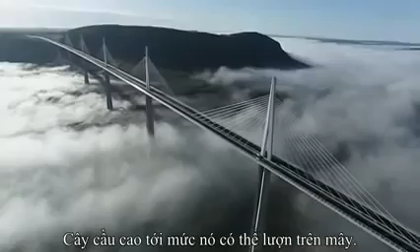This is the Millau Viaduct, the tallest bridge in the world. Its highest tower stretches a staggering 343 meters. So high, the bridge glides above the clouds. But this is a megastructure they said couldn't be built. When I've shown first the drawing of this bridge, they really thought I was crazy.

The team attempting to build this amazing freeway in the sky had to survive landslides, fight winds gusting at 130 kilometers an hour, and weather massive storms as the bridge simply hung in the balance. It's a bridge that pushes the boundaries of engineering to the limits, and then beyond.

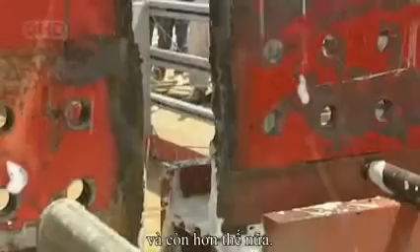Imagine building a series of Eiffel Towers, then slinging a 4-lane highway between them, all the way across one of the deepest valleys in France. Impossible though it sounds, that pretty much describes the building of the Millau Viaduct.

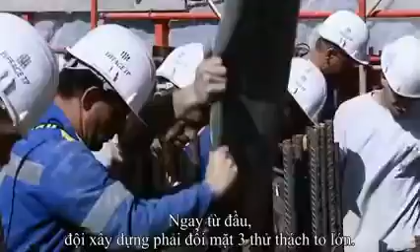From the start, the construction team faced 3 daunting challenges. 1. Build the tallest bridge piers in the world. 2. Put a 36,000-ton freeway on top of them. And 3. Erect 7 steel pylons, each weighing 700 tons. And what's more, they had to do this hundreds of meters above solid ground. So high that if you were on top of the Eiffel Tower, you'd still be looking up at this awesome bridge.

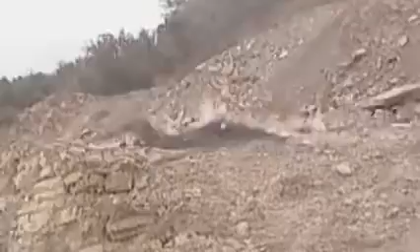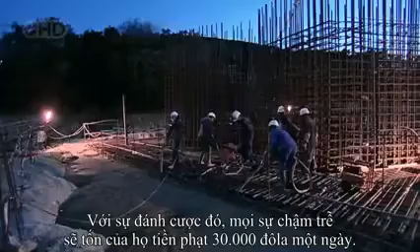October 2001, the team break ground. They're required to build a bridge that'll last for 120 years. And to win the contract, the teams promised to build it in record time, less than 4 years. By comparison, the world's longest suspension bridge, the Akashi Kaikyo in Japan, took a full 10 years to build. To up the ante, any delay will cost them $30,000 a day in penalties.

There are 7 piers that are numbered from the northern end of the valley. Number 1 will pose problems because of the steep slope. Number 2 will be the biggest challenge since it's the tallest. Crossing the river, number 3 is not much shorter. Then 4, 5, 6, and 7 climb the gentler slope to the south.

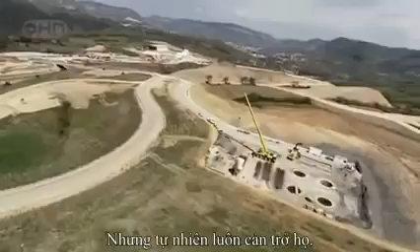To begin, the team had to bury the foundations deep in the bedrock in order to support the enormous weight the bridge will place on them. But the forces of nature were stacked against them. Geologists have warned of the risks posed by the region's fractured limestone. The rock is full of cavities that are essential to the local cheese economy. These cave systems, close to Millau, are home to a unique bacteria responsible for the blue mold in the world-famous Roquefort cheese. But what's perfect for cheese could be disastrous for a megastructure.

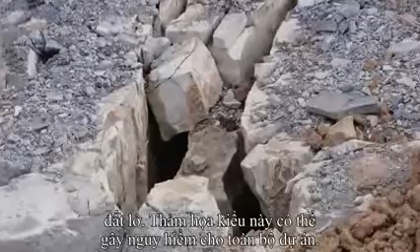The geologist's diagnosis spelt one thing: landslides. This kind of catastrophe could jeopardize the entire project. Despite the warnings, building went ahead as planned. Then, well into construction, as predicted, a dramatic storm causes a landslide. 4,000 cubic meters of rock collapse around Pier 1. Fortunately, the fallen rock doesn't damage the pier, but the warning is clear. They're forced to divert precious manpower and equipment to stabilize the slope and prevent a repeat collapse.

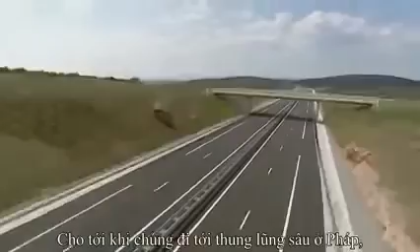So if the area is prone to landslides, why did they build the world's tallest bridge here in the first place? The answer is simple. In the 1980s, France built a freeway linking Paris directly with Spain. This major artery headed south across the French countryside, while from the Mediterranean, the freeway headed north, until they both hit one of the deepest valleys in France and stopped dead. Welcome to Millau, France's least favorite bottleneck.

The town of Millau is in the mountainous region of the Massif Central, one of the most tranquil parts of France. But in summer, this poor medieval town suffered traffic hell. The locals couldn't take it anymore. Neither could their mayor. It was terrible for our reputation. When you hear every day on the television and radio, avoid Millau, there's a traffic backup, a 5-hour wait in Millau.

And it's not just the people of Millau. Two drivers, Jamila and Jemima, crossing the 30-odd kilometers between the freeway on either side of Millau, reveal exactly why this bridge is needed. Jamila, in car 33, will cross the new bridge, while in car 22, Jemima will take the old road across the valley floor. Getting straight on the freeway, car 33 approaches the Millau Bridge after just 18 minutes. The only delay is the 30 seconds it takes to get through the toll booth. Then driving at 100 kilometers an hour over the spectacular bridge, she takes just 32 minutes to get to the other side.

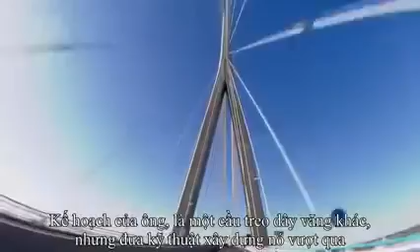12 years before construction began, up in Paris, the Ministry of Transport first came up with a plan. Their head bridge builder, Michel Virlogeux, is no ordinary engineer. He's a man who thinks big, very big. Like the Normandy Bridge in northern France, the longest cable-stayed span in the world. With this record-breaking structure completed, Virlogeux was on to his next, Millau. His plan, another cable-stay bridge, but pushing the technology beyond anything previously attempted, with piers 4 times higher than the Normandy Bridge.

The Millau Bridge would not only be the world's tallest, it would be unlike any bridge ever constructed. When I first showed the drawing of this bridge to the authorities, they really thought I was crazy. Virlogeux's Normandy Bridge has 2 sets of cables supporting the deck. But he wanted to up the stakes for Millau by losing 1 row of cables, so the remaining line would be forced to do twice the work.

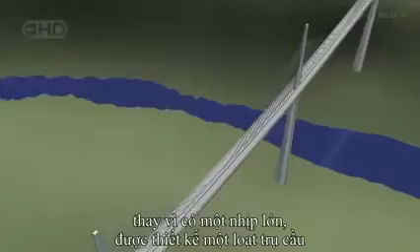More dramatically, the 2.5-kilometer Millau Bridge, instead of having a single main span, needed a whole series of piers to support it across the valley. No bridge builders had ever attempted a multiple-span, single-line cable-stay bridge on this scale before.

The French authorities had a problem. Nervous about Virlogeux's groundbreaking scheme, they held a competition inviting other engineers and architects to compete with different designs. The winner, Lord Norman Foster, is one of the world's superstar architects. In Hong Kong, he built the world's largest airport terminal. In Barcelona, offices literally hang from a mast on his communications tower. This is a man who regularly contemplates the impossible and delivers.

You know, it's the challenges, and it's one challenge on top of another, on top of another. And with Millau, one of the biggest challenges was making it fit into the landscape, given it's just down the road from the famous Gorges du Tarn, France's equivalent of the Grand Canyon. How do you make something which has to be so immensely strong against the forces of nature look very gentle, very delicate? How do you weave something on that scale into the most unbelievable landscape?

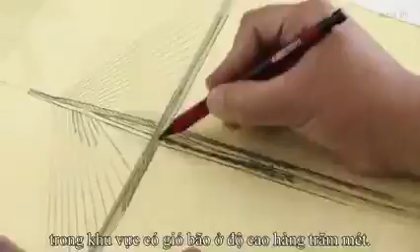Ironically, Foster's answer was to take Virlogeux's pioneering scheme, then push it one stage further. He turned an elegant piece of engineering into a delicate work of art by boldly cutting out 2 of the 9 original piers and seriously slimming down the remaining piers and road deck. Foster wanted the bridge to appear as delicate as a butterfly, but this butterfly has to support the weight of 5 Eiffel Towers in gale-force winds hundreds of meters above the River Tarn. Getting the design wrong would be a disaster.

Then, with Millau still on the drawing board, Foster's record as a bridge builder suffered a major setback. His Millennium Bridge in London is actually another record-breaking structure, the lowest profile suspension bridge in the world. But when this footbridge opened to the public in June 2000, it was a public relations disaster. Crowds walking over it set up a resonant frequency, and the bridge began to sway. As people adjusted their step to the small initial wobble, the effect was magnified.

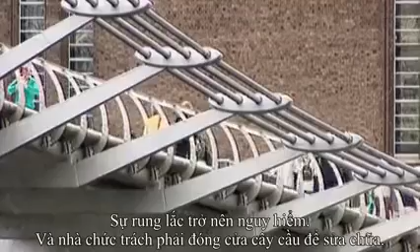Though it didn't threaten the structure, the swinging motion became so dramatic, the authorities closed the bridge for a refit that took 1.5 years and ended up costing over $8 million. It was a bad omen for the Millau Bridge, where construction was soon to begin. And at 15 times the height, a design flaw would be a catastrophe.

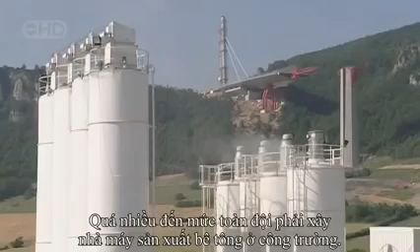December 2001, France's Millau Viaduct, the tallest bridge in the world, is under construction. Everything about this project is supersized. It'll need 200,000 tons of concrete, so much that the team have to build a concrete factory on site. But there's nothing straightforward about this concrete. The formula must be just right. It needs structural strength to support the massive loads it'll have to bear. But it can't set too quickly, as it has to be hoisted into position and poured hundreds of meters in the air. And it needs to be just the right color to suit Norman Foster's vision.

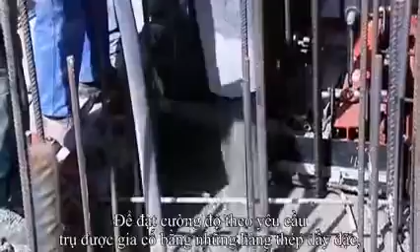In fact, the architect's vision has created a headache for the construction team. He's designed each pier as a complicated geometric shape, tapering the entire way up with vertical grooves set into them to create shadows. But what's just a line on paper for the architect was a major challenge to build. The enormous piers are built step by step by pouring concrete into a temporary mold. To give the required strength, the molds are filled with a frame of steel reinforcing bars. In total, 16,000 tons of these steel bars are hoisted into place and secured. Laid end to end, they'd stretch the 4,000 kilometers from Millau all the way to Central Africa.

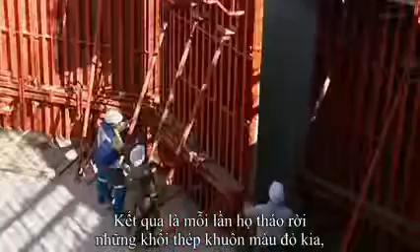The shape of each pier is seriously complicated. As a result, each time they remove the sections of red steel shuttering, they have to change the shape of the mold to fit the profile of the next 4-meter section. Manhandling these steel panels weighing up to 15 tons apiece is no picnic. And with the combined height of the 7 piers totaling well over 1 kilometer, they have to change the shape of the mold over 250 times.

Every 3 days, each team on each pier went through this whole cycle. Then they repeated the process. But it was a race against time, with a permanent threat of delay. Keeping the entire build on time and to budget was the daunting responsibility of one man, Jean-Pierre Martin.

If instead of 3 days we took 4, imagine that multiplied by the number of castings. We'd end up with a 3 or 6 month delay. With a penalty of nearly $1 million a month, this isn't something Martin wanted to contemplate. And this schedule wasn't his only headache.

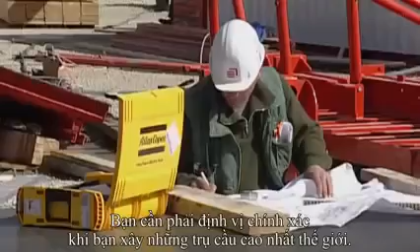You have to be pinpoint accurate when you're building the tallest bridge piers in the world. Get it wrong, and the bridge simply won't fit together. Just 10 centimeters out, about a hand's width on each 4-meter section, and the tallest pier could be 6 meters off at the top, the width of a jumbo jet fuselage.

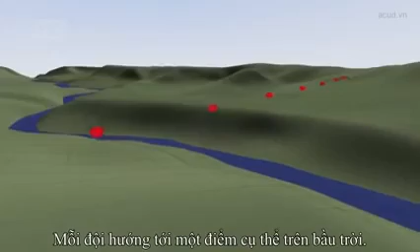Each team was aiming for a specific point in the sky. For Pier 2, this was exactly 245 meters above the ground, 546 meters from the north side, and 1,914 meters from the southern end. There was no room for error.

The only chance they had to get it right was with GPS, accurate to within 4 millimeters. Using signals from multiple satellites, the team could pinpoint their position and make sure they're on target for that critical point in the sky they needed to hit.

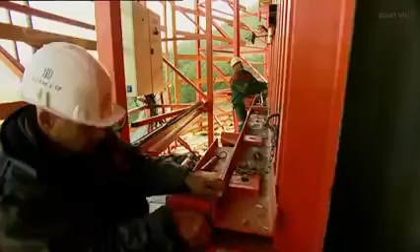Month after month, the piers climbed higher. Finally, by November 2003, they reached their full height. At 245 meters, Pier 2 becomes the highest bridge pier in the world. But is this record-breaking pillar where it's supposed to be? Amazingly, it's dead on target, to within 2 centimeters. Champagne corks pop. It's time for a major celebration.

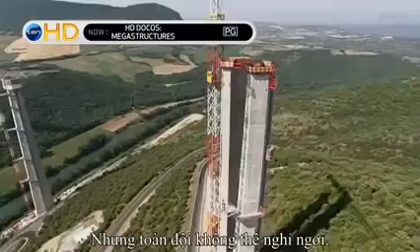Against all the odds, they were 1 month ahead of schedule, but the team couldn't afford to relax. The next stage of the project would be the most difficult part of the build. Phase 2 of building the world's tallest bridge involved putting a 2.5-kilometer roadway weighing 36,000 tons on top of the piers, a full 270 meters above the River Tarn.

Bridge builders know danger comes with the territory, but working at these heights can be lethal. More than 34 died constructing New York's Brooklyn Bridge. 35 died in 1970 on the Westgate Bridge in Melbourne, Australia. And 1 year later, 13 workers were killed when the Koblenz Bridge in Germany collapsed into the Rhine.

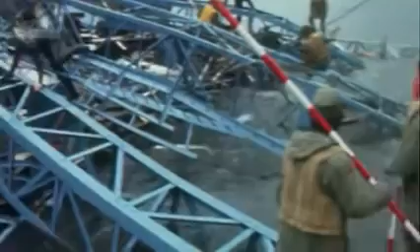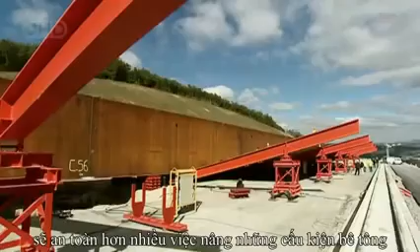With these fatalities in mind, the team decided to fabricate the entire road deck on the safety of solid ground. This meant building it in steel, which in theory would be much safer than lifting vast concrete sections hundreds of meters into position. There's only one problem with this plan. No one had ever put a road deck on piers anything like this height before, let alone over a 2.5-kilometer span.

In the end, only one steel manufacturer had the courage to take on this colossal challenge. Eiffel, the steel firm set up by the great French engineer. Eiffel built what was once the tallest bridge in the world, the Garabit Viaduct in southern France, before getting round to the framing for New York's Statue of Liberty and, of course, his signature tower in Paris.

But despite the company's experience, Eiffel's director, Marc Buonomo, knew he was taking a serious risk. It was a gamble for the company, because if there had been a mistake, if it hadn't worked, it would have been the whole company.

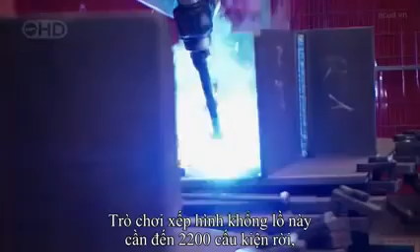They fabricated the massive sections that would make up the road deck in the company's steel factories. This immense jigsaw puzzle involved manufacturing 2,200 separate sections, weighing up to 90 tons and some of them 22 meters long. Their accuracy is measured with a laser to within a fraction of a millimeter.

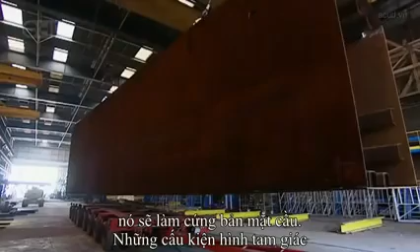Each cutting pattern or template is programmed into the computer. Then the machine automatically blazes its way through the steel. The torch reaches a scorching 28,000 degrees centigrade. That's 5 times the temperature of the Earth's inner core.

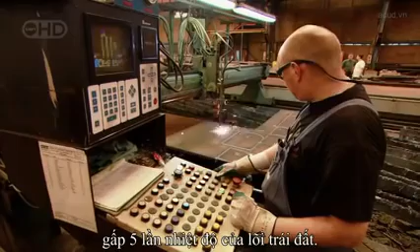But cutting and welding was the easy part. The hard part was getting these monster sections the hundreds of kilometers from the factories to Millau. The routes had to be planned with precision to avoid major damage. The police coordinated safety and clearances.

Even with that level of preparation, some obstacles felt as if they're cutting it just too close for comfort. And this was no one-off event. To build the viaduct took over 2,000 of these extraordinary road convoys.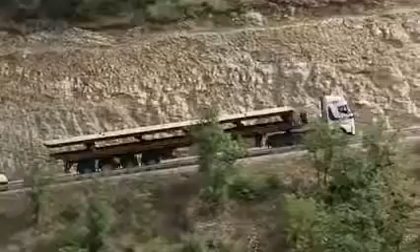The components arrived at assembly plants set up, one on either side of the valley. Here, the pieces of the massive jigsaw puzzle were welded together to form the 2 halves of the deck. But getting these 2 halves to span the valley on top of the world's tallest bridge piers would be a major challenge. They'd be the first team to put a road deck on a pier taller than an 80-story skyscraper.

And pushing bridge building beyond anything attempted before, they planned to slide the entire 2.5-kilometer road deck over in 2 colossal pieces. The bridge's chief engineer, Jean-Marie Cremer, was one of the few people who believed it could be done. All the engineers who know this method, who were in the know, didn't believe it was possible. If the team had got their calculations wrong, the entire structure could collapse into the valley.

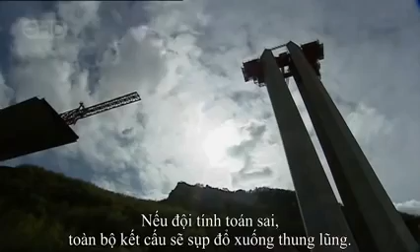We found a solution for the construction, which was to launch the bridge from the 2 sides. One part on the Larzac Plateau, one on the Rouge Plateau. And to push them from the 2 sides and to make them come and meet here above the River Tarn.

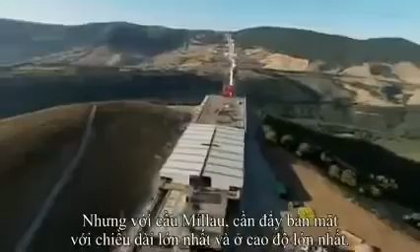Smaller bridges use a similar technique. A powerful set of hydraulic rams literally pumps the deck from one side to the other. But Millau would be the longest launch ever attempted over the highest piers in the world, and the results could spell disaster. The deck is so slender, it would bend and collapse if it were pushed out over the 342-meter spans between each pier. The furthest anyone's previously managed is less than half that distance.

The first part of the solution was simple. Fit a pylon so its cables support the front of the deck as it goes out over the valley. Then construct temporary steel support towers that halve the spans to a more manageable 171 meters. These steel towers were a construction feat in themselves. The largest, over 170 meters high, is the tallest ever built, and they needed to carry a massive load.

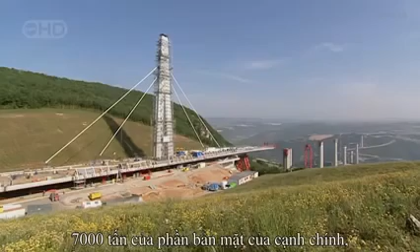7,000 tons as the leading edge of the deck, together with the first 90-meter pylon, slide over. And simply pushing this enormous weight over the top of the vulnerable piers would bring them crashing to the ground. This was the nightmare scenario. If we'd done a conventional launch, we would have knocked the piers over like the pins in a bowling alley.

Someone needed to reinvent the way this type of bridge is built. And it's Marc Buonomo with Jean-Marie Cremer who came up with the breakthrough. The basic principle can be demonstrated with a heavy box and a wobbly table. With a normal launch, you knock over the piers. I want to advance the deck over the pier, but if I push the deck from here, I'd knock over the piers, because they're so tall.

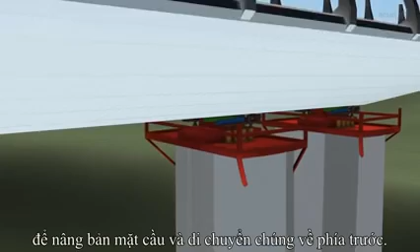The idea is to install a launching system on top of the pier, and that way, if I push the deck, it has no effect on the stability of the piers, and the piers won't fall over. The trick is to use a series of these launching systems to jack up the deck and inch it forward. Each system uses two wedge-shaped blocks under each side of the deck.

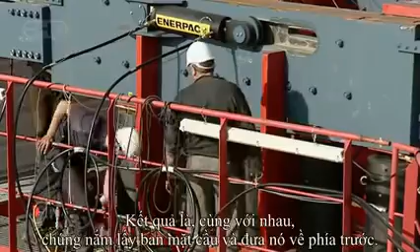The upper wedge is pulled forward by a hydraulic ram. It slides up the slope of the lower wedge at the same time, lifting the deck from its supports and advancing it 600 millimeters. The lower wedge then retracts, dropping the deck onto its supports. The upper wedge returns to its original position, and the whole cycle begins again. 4 of these clever devices are placed on each pier, all programmed to work at exactly the same time. The result is that together, they pick up the entire roadway and shunt it forward.

But if one fails or gets out of step, it could spell disaster. The force could push the bridge piers apart till they collapse. When you're up there and you see Millau 300 meters below you, you ask yourself, was this a good idea? The future of the entire project was now hanging on a prototype, and it had never been tested.

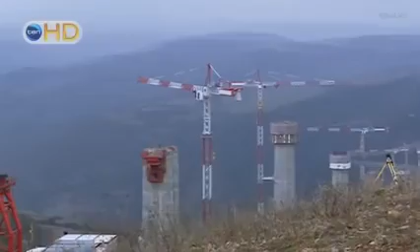It's the morning of February 26, 2003. Do or die day for the world's tallest bridge. Everything is about to be put to the test. The flexibility of the deck, the strength of the temporary piers, and critically, the pioneering hydraulic ram system. Even Buonomo, the man in charge of the launch, had his doubts. As it had never been done before, I have to tell you, I had fears that it wouldn't work.

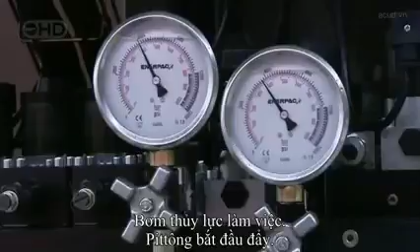The pumps kick in, the pistons start to push, and the deck begins its huge journey across the valley. The moment I heard the motors start, I put my finger on the deck, and I could feel my finger move. Every 4 minutes, the deck advanced 600 millimeters across the valley. Surveyors tracked its progress. But it was still a nail-biting time as they watched the unsupported deck crossing the void.

Eventually, the deck reached the safety of the first pier. 204 meters down, only 2,256 to go. The launching system seemed to be working as planned. The engineers were feeling optimistic.

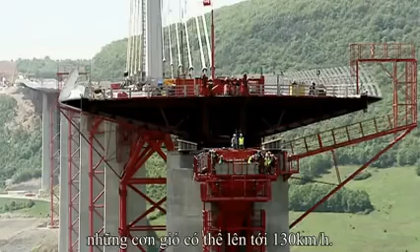But as the deck advances into space, it'll become more vulnerable to the wind, which can reach 130 kilometers an hour. Unfortunately, the road deck has the shape of an upside-down airplane wing, and the team's greatest fear is that this wing could simply take off.

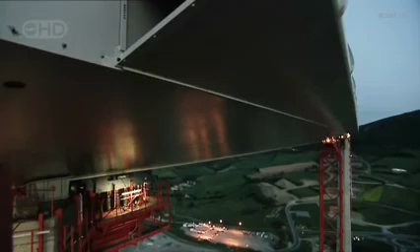The engineers kept a close eye on the wind and weather conditions. When they were satisfied there was a 3-day weather window and the wind wouldn't exceed 85 kilometers an hour, they'd give the construction team the go-ahead, and the deck launch could continue. The reason for this precaution is simple. Strong winds can literally tear a bridge apart.

In 1940, Washington State built a suspension bridge across the Tacoma Narrows in the US Northwest. It opened with a grand ceremony on July the 1st. But the celebrations were short-lived. The bridge had a major problem: the wind. Girders beneath the deck, designed to make the bridge rigid, actually blocked the wind, causing the roadway to ripple alarmingly. Locals soon dubbed it Galloping Gertie.

On the 7th of November, with the wind less than 70 kilometers an hour, the bridge begins to twist violently. At 11 a.m., time runs out for Galloping Gertie. The wind sends the bridge crashing into the river.

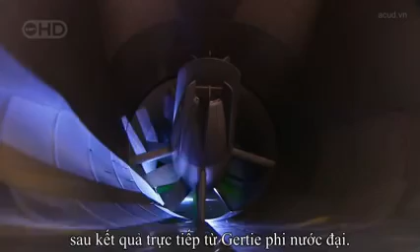Wind tunnel testing is now standard procedure as a direct result of Galloping Gertie. For the Millau Bridge, they analysed the wind in the Tarn Valley over 18 months, then recreated those conditions in the wind tunnel. Wind engineer Olivier Flamand was shocked by the results. The average wind speed was relatively low, but because there's such strong turbulence, it created very fast peak winds.

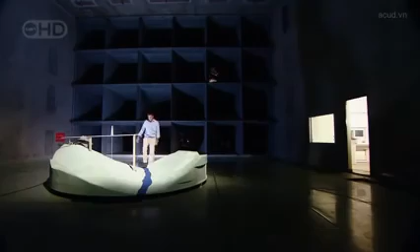The rugged terrain creates serious turbulence at the height of the road deck. Winds peak at 130 kilometers per hour. That's hurricane force. They tested every aspect of the bridge to analyze the risks: piers, pylons, and critically the deck. But it's not just the aerodynamics of the finished bridge. They needed to find out how it would behave when it was most at risk, during the launching of the deck.

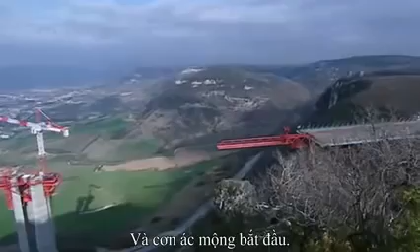Olivier and his team reached a chilling conclusion. The winds they've measured are strong enough to blow the unsecured deck off its supports and send it crashing hundreds of feet to the valley floor. And then the nightmare began. On the 22nd of August 2003, 6 months into the deck launch, one of the launch systems failed, leaving the deck hanging in the wind. To make matters worse, the weathermen were predicting storms.

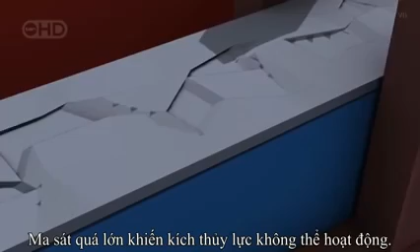So far, these massive pumping machines had worked perfectly. But the fact is they were prototypes, and due to the frantic schedule, they'd never been tested. The problem was that the non-stick Teflon between the sliding surfaces had ripped, and the friction generated was too much for the hydraulic rams to push against. Unfortunately, no one had planned on replacing parts of this monster machine mid-launch on the top of a massive concrete pillar. This was very bad news for the man who staked his reputation on this system.

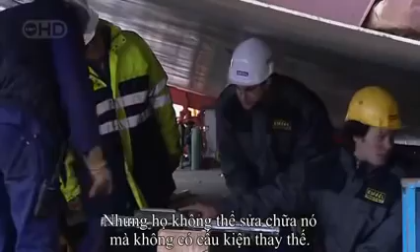It was maximum stress, like poison in your mouth. You don't forget that. Re-examining their calculations, they realized the cause of the problem. They'd underestimated the forces between sliding surfaces, but they wouldn't be able to repair it without the necessary spare parts. The clock was ticking, and Marc Buonomo needed a solution fast.

When Apollo 13 came back with that incident, the NASA engineers requested they did the inventory of everything there was on board to know how to fix it. The Millau team did an inventory. They realized that the other launching machines, not yet being used, could be stripped to provide the new Teflon surfaces they needed.

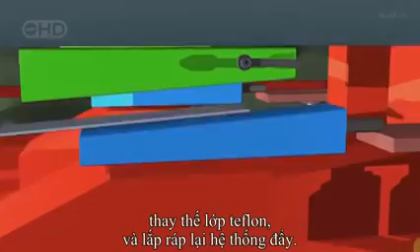Working all through the night, the team extended the access platform. This allowed them to take out the 5-meter-long, 2-ton steel wedges, replace the Teflon, and reassemble the launching machine. By 8 a.m. the next morning, it was ready to resume the launch.

The rest of the week, the predicted storms arrived, and another set of launching machines wore out. So when the deck finally made it to the safety of the next pier, the team breathed a major sigh of relief. You don't forget that. I won't forget that for 4 hours I was really scared.

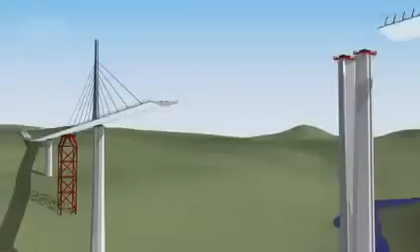The two decks continued their journey across the valley. Day after day, week after week for a full 14 months, they approached each other, millimeter by millimeter. By May 2004, they'd reached a critical phase. From the northern end, the shorter deck had traveled 717 meters into space to reach its final resting place. From the south, the longer deck extended over 1.5 kilometers. Only the section over the river, the one point where it was impossible to erect a temporary pier, divided them.

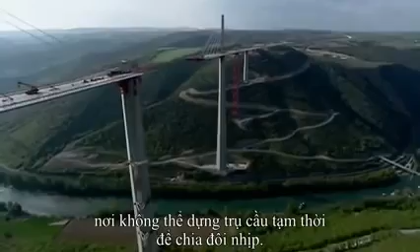But would they meet as planned? If they've got their calculations wrong, they'll have built the biggest white elephant in Europe. Even the man behind the whole project had his doubts. I was not convinced at all that the two parts of the deck could meet exactly with a perfect geometry. The odds were against them. Calculating such a feat so precisely is a Herculean task.

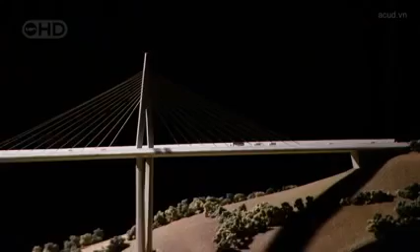Firstly, the two starting points on the northern and southern slopes of the valley are at different heights. Secondly, the bridge has a subtle curve to it. As a result, each steel panel which makes up the road deck had to be cut and welded with extreme precision. It would be an engineering triumph if they got these two sloping curved decks to meet as required.

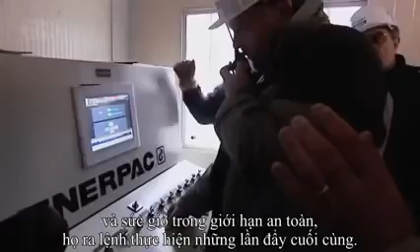The team checked the weather reports. With the wind inside safety limits, they gave the go-ahead for the final push. The rams began to drive the deck's leading edge off the safety of Pier 3 towards its destination. At this point, a total of 21 launching systems needed to move at exactly the same moment to avoid disaster. If anything were to go wrong now, the man responsible would be Marc Buonomo.

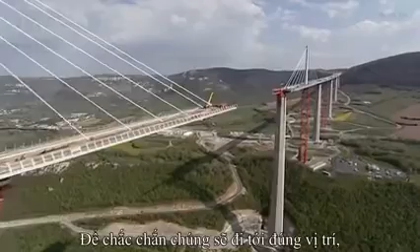Everyone asked me, how can you be sure that it will go straight? So to be sure that they were going to the right place, I had a GPS put on the front, so I could see the gap between the theoretical and the real position.

Over the next 2 days and nights, the deck advances 600 millimeters at a time towards its final resting place. The world's media are watching the critical meeting of the decks, and to add to the pressure, the French Prime Minister is due to drop in to celebrate the event.

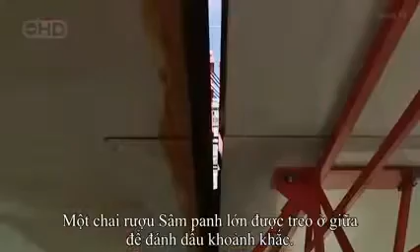The deck pushes forward. Now, with only centimeters separating the two sections, a magnum of champagne is hung between them to mark the moment.

At last, union. The two massive steel decks have traveled high over this valley, a total of 2.5 kilometers, and when they check, they're aligned to within 1 centimeter. That's accurate to within 99.9999%. All the measuring, all the calculations have paid off. They've nailed it.

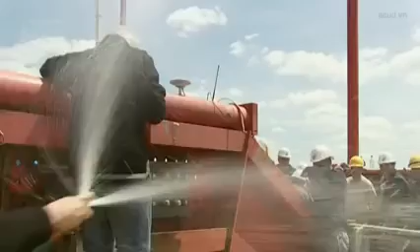The meeting of the decks was a special moment. News reports traveled round the world, and in Salzburg, Austria, they reached Felix Baumgartner, aka Felix the Conqueror.

Felix has made a career base jumping from some of the tallest structures on the planet, and within 24 hours, he'd driven to Millau and was calculating the logistics for the jump, factoring in his two main aims: to avoid arrest and death.

Baumgartner waited for darkness before arriving on site. He found his way to the base of Pier 2, then climbed an access ladder the full 245 meters to the top. He entered the steel road deck and found a place to hide until daybreak. He had to remain concealed until the sun was high enough for his cameramen to record his world record attempt.

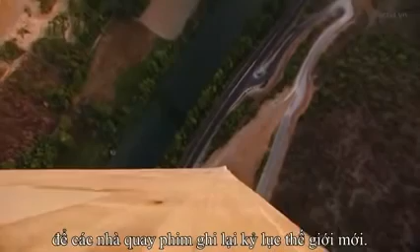At 7 a.m. the following morning, Felix the Conqueror emerged. He took a cool backward flip off the tallest bridge in the world and entered the record books.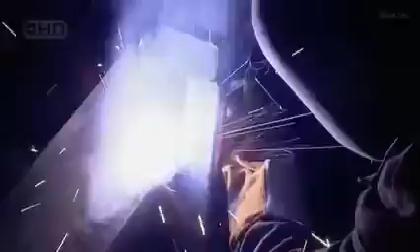The decks have been joined, and the team have reached the final phase of the project. But there was still a race to meet the schedule, and their problems weren't over yet. Everyone could see the dramatic undulations in the flexible steel deck. Even some hardened bridge builders wondered about its structural integrity.

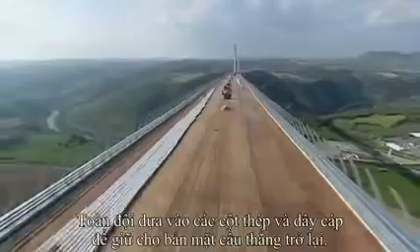It was a huge surprise for everyone. All the engineers said, we knew steel was flexible, but not that flexible. The team were relying on the pylons and cables to pull the deck straight. Each massive pylon is 90 meters high and weighs 700 tons, the equivalent of 85 London buses. Placing them in position on the slender deck, high above the valley floor, would go beyond anything ever attempted.

Once again, Marc Buonomo had a plan. You know, the first people to make vertical pylons were the Egyptians. Buonomo adapted a technique used in ancient Egypt to erect obelisks in the sands.

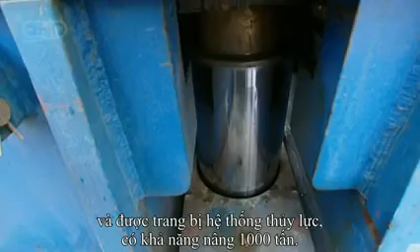On top of the road deck, the team put up two enormous steel towers, both secured by cables and equipped with a hydraulic system capable of raising 1,000 tons. The 700-ton pylon is then lifted by the hydraulics. As it rises, it pivots little by little until it's vertical. It's then lowered safely onto its anchorage point. Buonomo's 4,000-year-old technique worked to perfection.

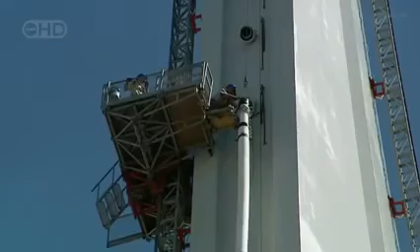With all 7 pylons in place, the team could attach the cable stays that would straighten the rippling deck and give it the strength to cope with full traffic loads, they hope. The weight of the roadway is now over 40,000 tons, the equivalent of a cruise ship, and the 154 cable stays should prevent it from sagging or collapsing.

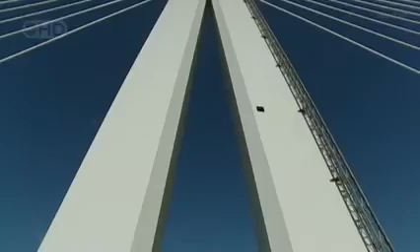The strongest stays are made up of 91 individual steel strands and have a breaking strength of 25,000 tons, strong enough to hold back 25 jumbo jets all at full throttle. As the cable stays are tensioned, true to plan, the ripples in the road deck are pulled straight. Over the 2.5-kilometer deck, the ripples are now no larger than the size of a thumb.

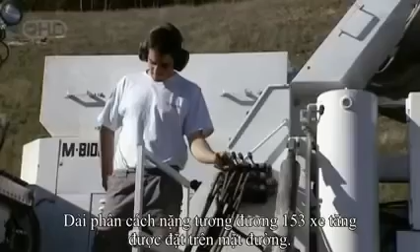They're finally on the home straight. The road surface goes on, adding a further 10,000 tons to the load. That's like driving 153 battle tanks onto the deck. But before it could open to the public, the team needed to know the bridge is safe. It would have to pass one crucial test.

After 3 years, the construction team building France's Millau Viaduct, the world's tallest bridge, are about to find out if they got their calculations right.

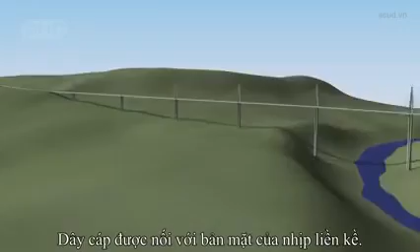On a single-span cable stay bridge like the Normandy Bridge, a large load on the main section is no problem because the cables are attached to solid ground and can't give. On the Millau Viaduct, with its 8 spans, the cables are attached to the deck of the adjacent sections. A load on one section will cause it to drop, pulling the stays down. As the pylons lean in, the matching stays are pulled upwards, lifting the neighboring decks and causing a dangerous rippling effect.

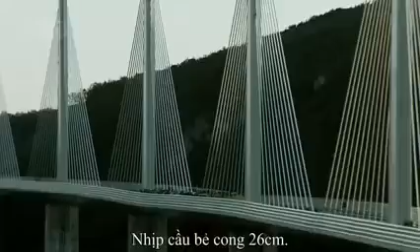It's right now the team put their bridge to the test. These 28 trucks have a combined weight of over 900 tons. They are now positioned in the critical point, mid-span. The engineers hold their breath. Measurements are taken. The span bends just 26 centimeters. This is a triumph for the engineers. The bridge was designed to cope with more than double that.

4 weeks later, on December the 14th, 2004, President Jacques Chirac officially opened the Millau Bridge. A proud moment for the whole of France.

Just over 3 years of construction have produced the tallest bridge in the world, designed to last at least 120 years. And against the odds, the project manager even brought the job in on time. But that's not what he's most proud about.

What I remember, because on construction sites there are often accidents, is that we had no serious accidents, nothing more than a minor injury.

As soon as it opened to the public, the bridge was an instant success. But the real test isn't till its first summer, when the French all take their annual vacation. No one ever expected anything like this. Numbers peaked at more than 50,000 vehicles a day. At over $7 per car, that's great news for the construction company, who are clawing back their $478 million investment in the project.

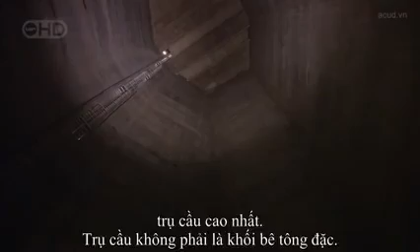This was an epic bridge to build, but it's just as epic to maintain. Thierry and Frank are assigned to P2, the world's tallest bridge pier. This structure is no solid concrete block. It's a series of vast hollow spaces. Their job today is to test the communication system and electric circuits on each of the 7 structural floors.

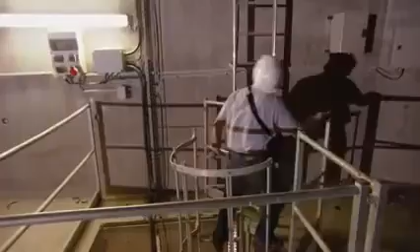This involves a 343-meter climb, going hand over hand up a ladder for the rest of the day. By dusk, when Thierry finally reaches the summit of the pylon, he may be exhausted, but there is a payoff. You get a fantastic view from here, a 360-degree panorama.

The tallest bridge in the world has become an icon. But this is creating problems no one had ever imagined. Locals have been taking over the bridge as a platform to get media attention for their causes. This crowd was hoping that driving sheep over this freeway in the sky would help them get more farming subsidies.

Jose's job is to prevent this kind of incident from creating a danger, and on this bridge, the incidents keep on happening. An alarm triggered by a motion detection system means there's a stopped vehicle on the bridge. Immediately, Jose dispatches a colleague to deal with the situation. The last thing anyone wants is a multi-car pile-up on a 2.5-kilometer bridge, quarter of a kilometer in the sky.

Jose zooms in his camera to reveal the man has left his car and is sitting dangerously on the crash barrier. The driver's probably only broken down, but already one man who stopped climbed over the wind barrier and jumped to his death.

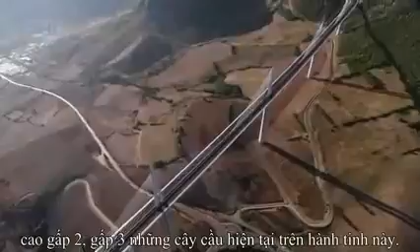And the result certainly pleases the man who dreamt it all up. To see erected this bridge, which I imagined 15 years ago, it's something magic.

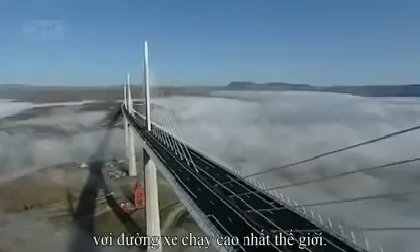This is the longest pure cable stay bridge in the world, the tallest roadway in the world, and of course, at 343 meters, it is the tallest bridge ever constructed.